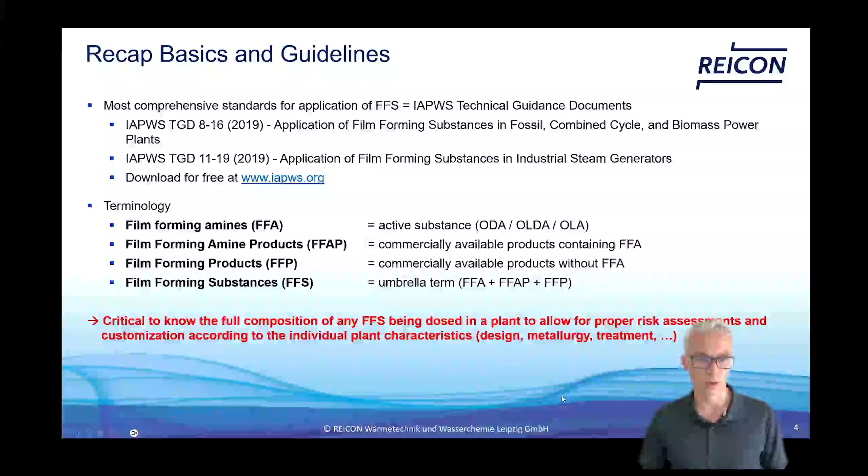In the second webinar, we heard about the analysis procedures. In the TGDs, there are two methodologies included: one is the extraction method with methyl orange, the other is the xanthene dye reaction.

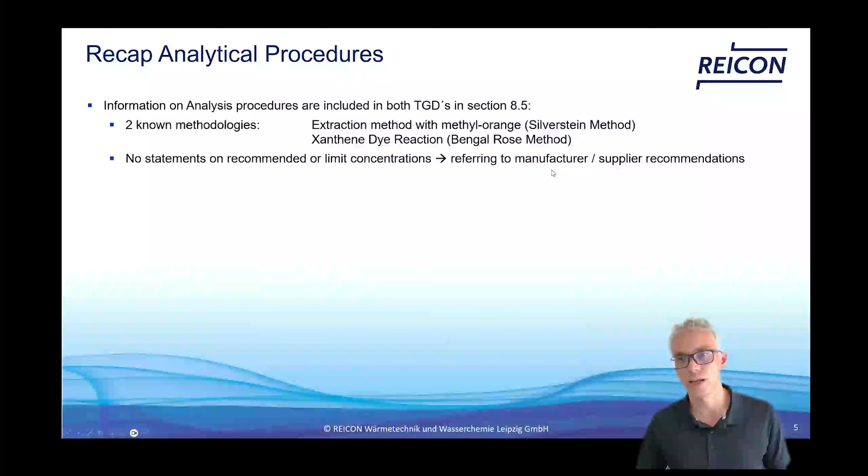From both methods, there is information given inside the TGD. What we do not see is any recommendation on the concentrations of the product - this is related to the manufacturer guidelines. Three different procedures are available.

We have the field test, which is a fast analysis, mostly done by grab sampling, with no additional photometer necessary to get information about the concentration in the system. But the sample needs to be analyzed quickly because there is nothing inside which allows the sample solution to be stored - so we get a filming of the sample bottle as well. You need to follow the rules of sample taking, and then it will work very well.

Then we have the laboratory procedures, which have very high accuracy and a very low detection limit. If you add the buffer solution, it's also possible to do transport or storage of the sample taken from the system. But you need specific laboratory equipment, and also you need some practice in doing those analytics to get reliable results.

And the last thing is online monitoring, which provides a continuous measurement of the FFA in the system with very high accuracy. But of course, there are some investment costs related to purchasing the system and the chemicals which are necessary.

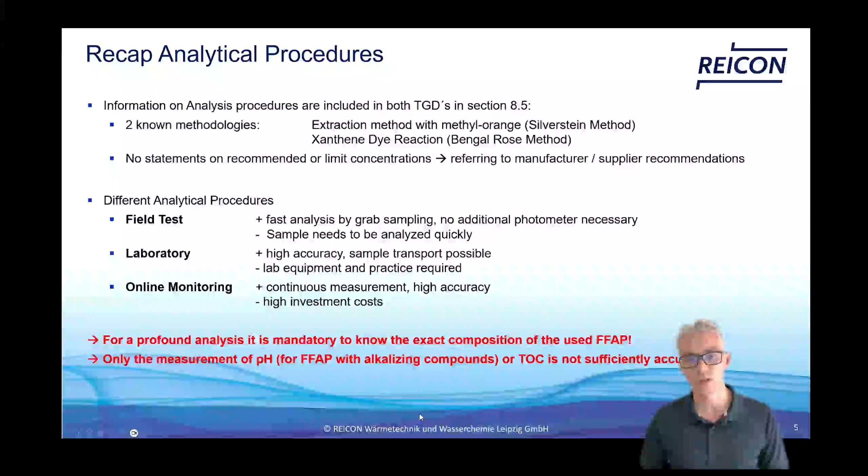So you need to know which product you're using and which FFA is inside. A measurement of pH alone, when you're using an FFAP with an alkalizing compound in it, is not accurate enough to have a safe application, especially when you're doing continuous dosing of FFAs in the system.

Starting with the topic of today, I would like to give you some information on why power plants, for instance, or also industrial plants, consider the use of film-forming amines.

In most cases, it is due to some cycling operation because of an increase in flexible power production. So you never know exactly when to start or when you will stop again. At the same time, you need to have high availability - you need fast startup times, and you need to protect the system in the offline period, whether that is 2 days or 2 weeks.

You need to make sure that you quickly achieve the limits of steam quality, especially to run the turbine. In some cases, plants need to start up very quickly without having the right quality for running the turbine without problems. That's why there's a need for additional protection to the system.

Load changes have an influence, especially in the phase transition zone at low or part load of the power plant, so you have fluctuating conditions. The area, especially the last steam blades, can get wet and dry, and so the condensing point is changing, which can cause deposits on the steam turbine.

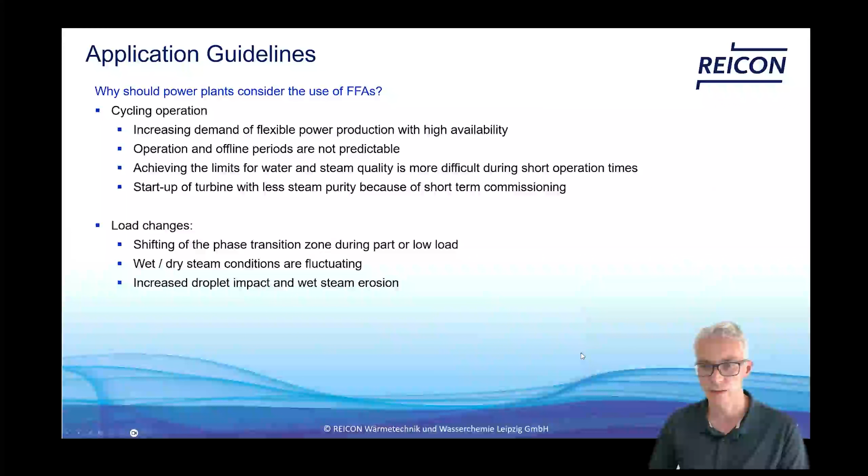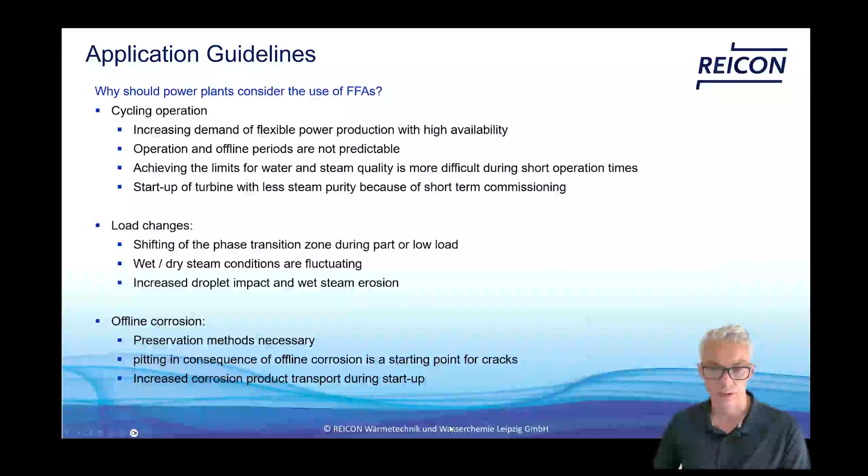You can also have increased droplet impact, especially on the last turbine blades, which can cause erosion on those blades. With that erosion, and maybe some pitting corrosion from offline periods, you can get cracks, which can be starting points for stress corrosion cracking.

Also, especially after a longer outage, you can have increased corrosion product transport, so you get all the related issues with clogging filters and getting a lot of particles in the system.

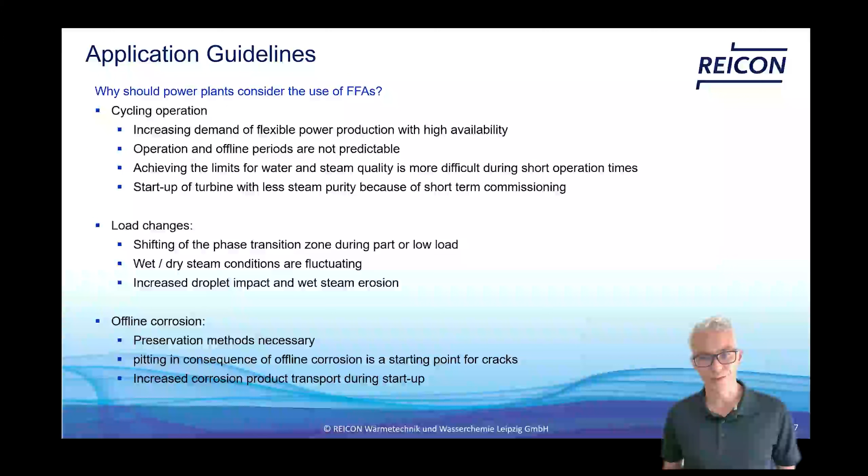Generally, we start to feed the FFA in the feed water tank, because here you have good mixing within the feed water, and you can easily control your dosage by measuring the concentration in the feed water tank.

The second option is dosage into the condensate lines. The benefit is that shortly after starting the dosage you will protect your preheaters. So if this is a point to look at in terms of corrosion, it's always recommended to inject in the condensate lines.

There might be a need for high pressure dosing equipment when you dose in this area, but you need to see the details of the plant, where is the best way to inject, and also what is the scope of the application.

If you have an air-cooled condenser, for instance, it might be useful to have additional feeding right in front of the air-cooled condenser, because this is the equipment with the highest surface, mostly made of carbon steel. So if you get problems with offline corrosion, it will be in this area.

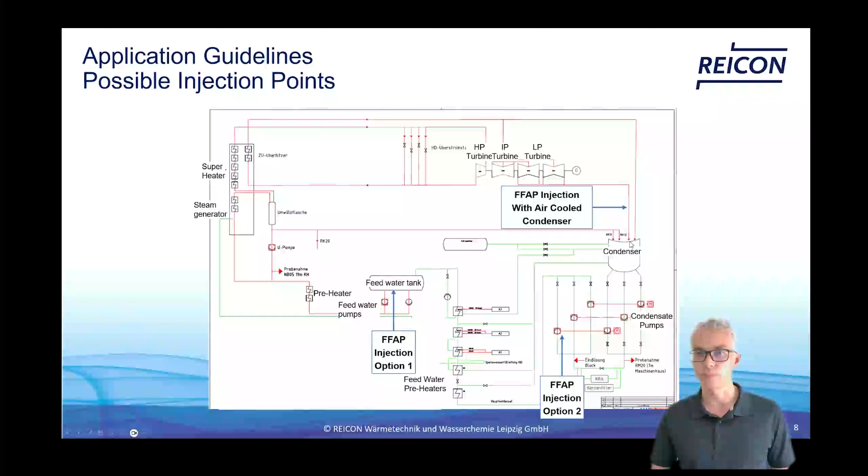Generally, cycling operation is characterized by operation times and standstill periods. These standstills are unpredictable, because they can happen on short notice, and then you never know how long the standstill will be. Is it a small one, or will it take longer?

So it's really difficult to apply standard preservation procedures like drying the system, or filling the system and capping it with nitrogen. Especially if you have daily starts and stops, it's really, really hard to find the optimum application.

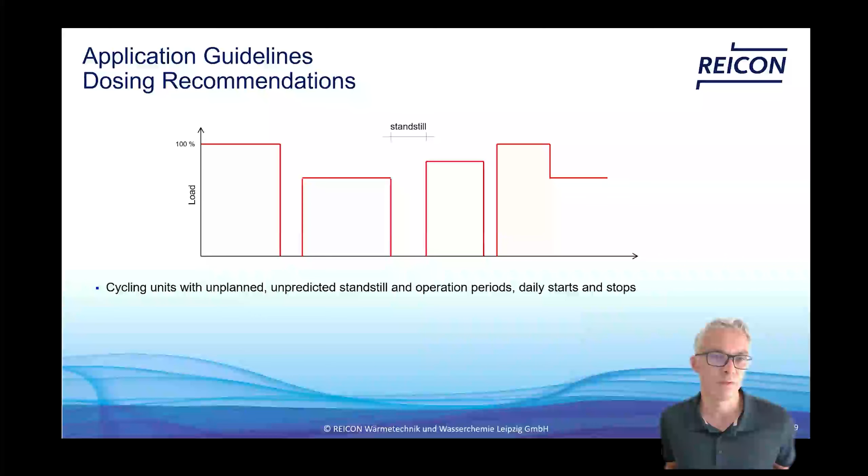So in this situation, the film-forming amines can be a very good solution. They are dosed at a very low concentration. This concentration depends, of course, on the product used, but also on the operational time in regard to the standstill time.

If you have more operation and less standstill, you can go with a lower concentration. If you are facing a lot of standstill with very short operation cycles, then it might be useful to have a higher concentration of filming amines as a residual in the system.

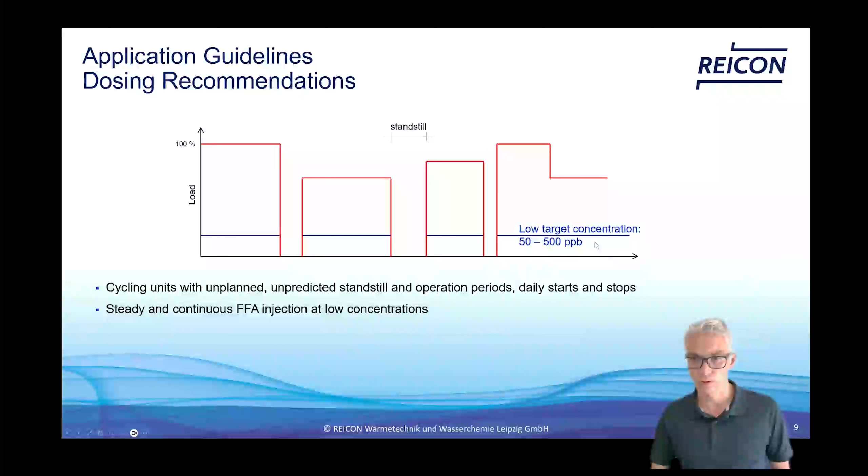This is the concentration after you have the complete filming of the system, so the residual, which we can measure with the analysis procedure introduced in the last webinar.

Of course, if you have continuous dosing, you need to monitor your concentration very frequently, to make sure that, also in load changes and low load operations, you do not exceed the concentration limits and create any problems in the system.

Of course, it would be much recommended to use an online monitoring system to be safe at all states, or to perform a regular lab analysis twice or 3 times a day to make sure that the concentration is in the right target.

When you're starting adding FFA, you will see that you might have some changes in your water chemical values, especially when we look at the conductivity after cation exchange or other values, because we have an implementation phase where there are some changes, especially when there are some impurities settled down on the surface. They will be removed and captured with the FFA.

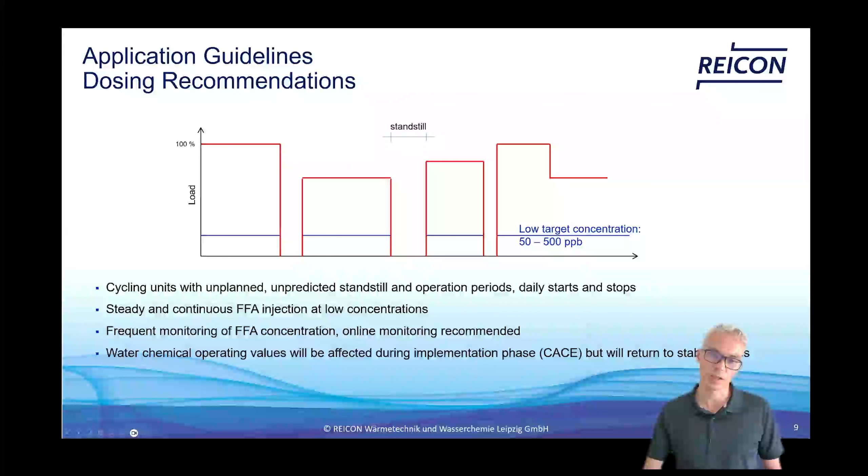So we will see an increase. But after a while, maybe 2 or 4 weeks - this depends on the system, on the concentration, on the operational parameters - we will see again stable values, and a new baseline may be forecast because of the organic matter of the product and the created CO2. This might have an effect on the conductivity of the cation exchanger.

Yeah, of course, there are some restrictions. We already talked about the CACE increase. It is an organic molecule, and it will start to decompose at temperature above 400 degrees Celsius.

So it will form mainly volatile products. So it's CO2 and NH4 and other volatile products, which depends also on the used FFA, but also on the used film-forming amine products and the other byproducts which are in this mixture.

In some cases, it is reported that it will come to a formation of low weight organic acids. So you need to check again what is the composition of the product, what is inside of this. If you use a blended product or a mixed product, what are the individual active substances and what risks are according to that.

And if you have a creation of carbon dioxide, you will increase the CACE, especially in the conversion time during the first weeks.

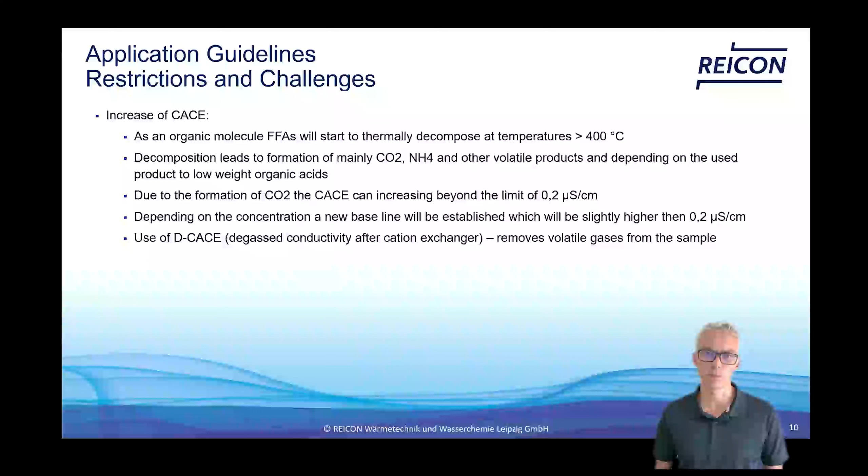If possible, and maybe if it's installed, you can use a degassed conductivity measurement, which removes the volatile gases from the sample, and then you can see, again, very low conductivity values. This will help also to avoid the influence of the CO2, which is created by the decomposition. And you can easily detect any leakage from the condenser with this method.

Another part is if you're having a condensate polishing plant in operation, in those mixed bed resins, the FFAs are accumulated in the filter vessel. So we saw some applications where, especially after treatment with very high concentrations, the top layer of the resin is floating up.

This is due to the accumulation of the FFA in the resin bed, and then because of density it comes to like a floating effect, and because of the temperature and the saturation concentration, we see a white layering on top of the resin bed.

But this can be solved by increasing the temperature in the condensate polisher. We also did some research on that and see that especially when you do a warm regeneration or an additional treatment with caustic, the capacity is not affected, and the regeneration process can be done normally without having any influence on the capacity of the used resins.

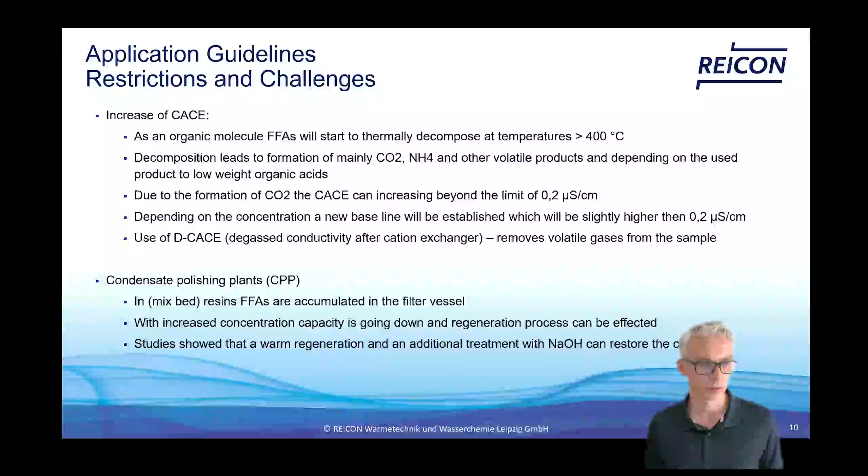So let's come to a few case studies. The first one is a combined cycle unit located in the western part of Germany. The system consists of 2 gas turbines, 2 HRSGs, and 1 steam turbine without a condensate polishing unit, and it's under flexible operation with very low operational cycles, and a very fast startup was required.

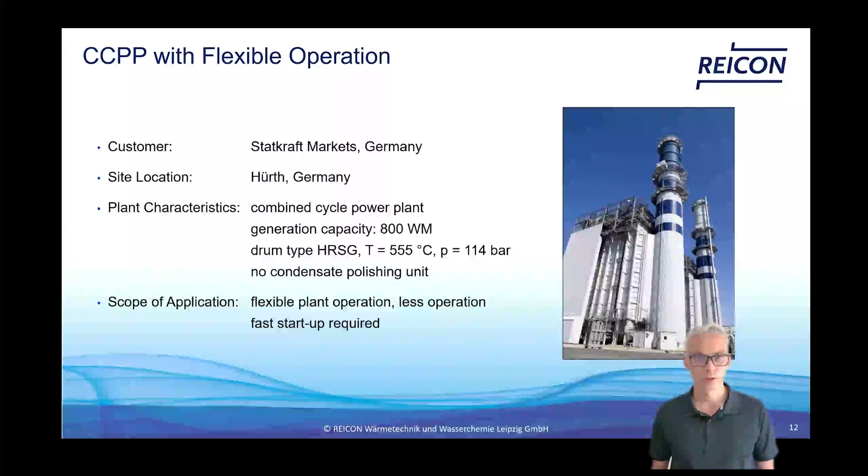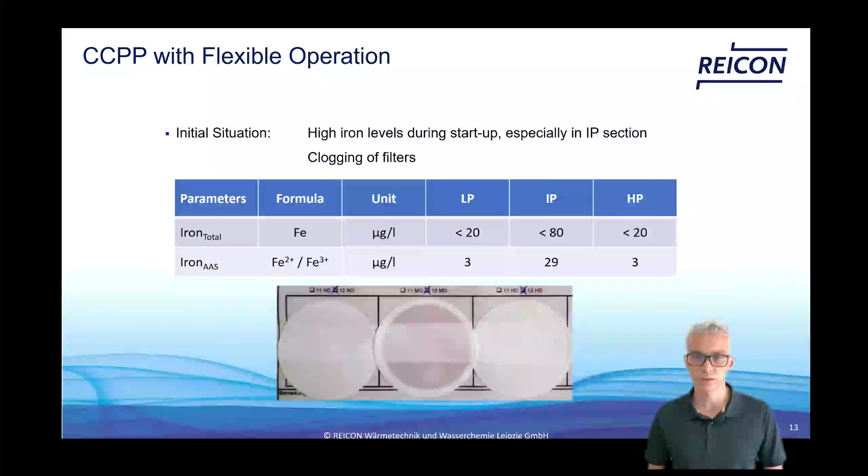The initial situation was that even with an already existing preservation in place, there were some problems with high iron levels during the restart, especially in the intermediate pressure section. And then it comes to clogging of filters in the condensate, and they had to shut down the plant again during the restart to clean the filters and do the restart again.

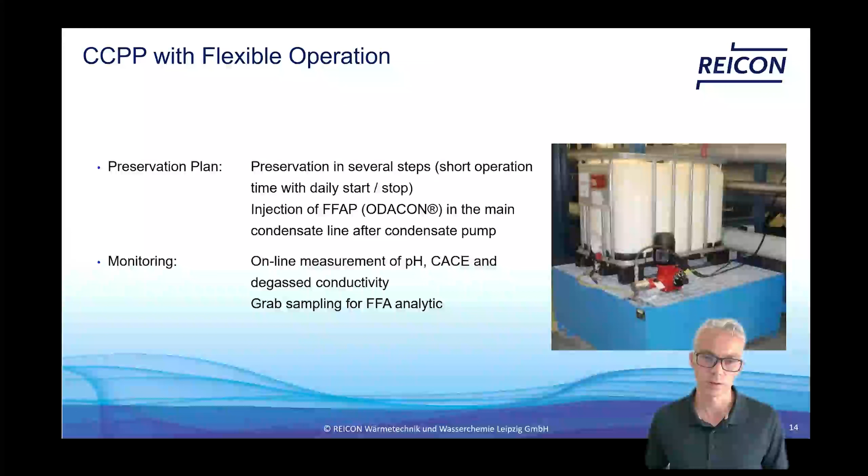We applied the dosing into the condensate line after the condensate pump using a high pressure dosing system. And we could measure the pH, CACE, and also degassed CACE online, and did a grab sampling for the FFA analytic. And we saw very good results, especially in the condenser area and in the last stages of the steam turbines.

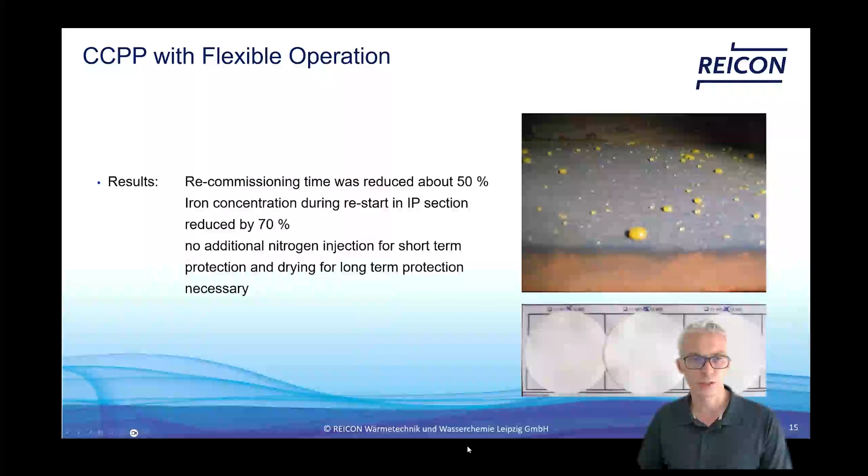We had established good layering, and the iron concentration during the restart was reduced by 70%, which is a very good effect for the plant. No clogging of filters anymore, and they don't need an additional nitrogen injection in the boiler or drying for the system, especially the steam turbine and condenser, for corrosion protection. They just did it using the FFA.

Another example is a biomass plant in Sweden, which runs only during the winter time, and then only for peak load operation. So here too, very flexible operation with a lot of starts and stops.

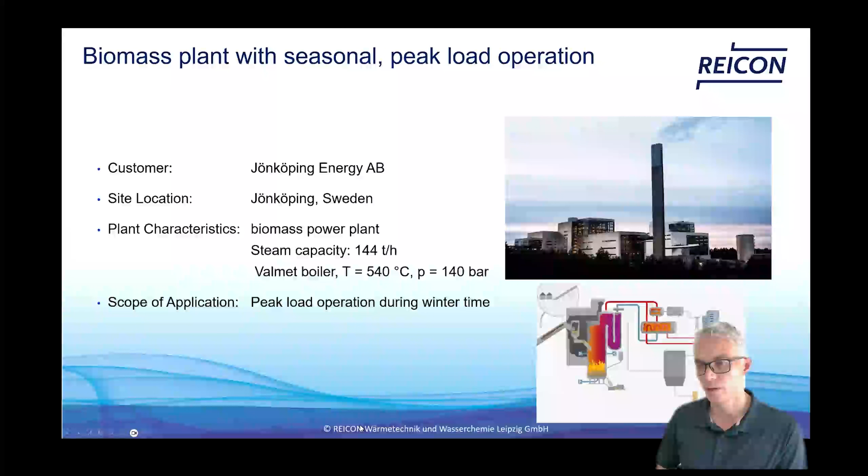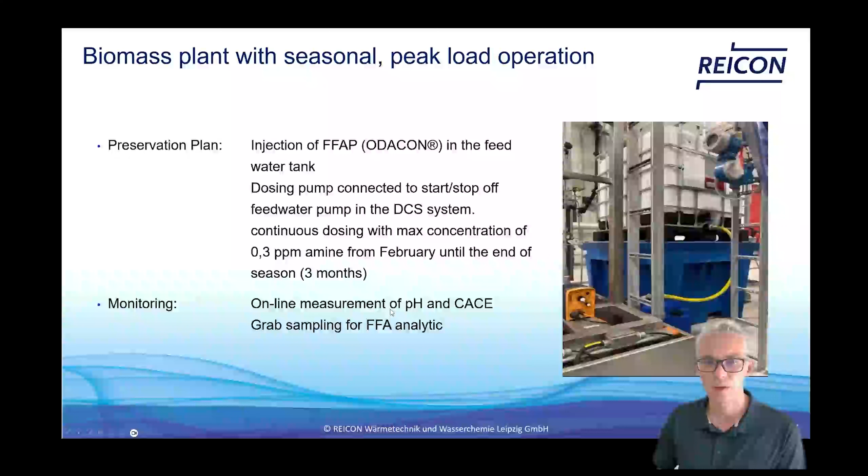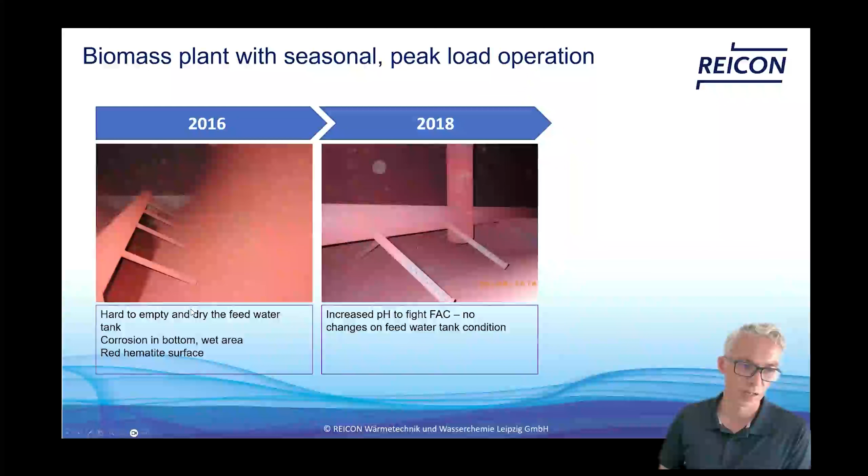We injected the ODACON here in the feed water system, and established a concentration of around 0.3 ppm of FFA in the system. Here too, we could see that before treatment the feed water tank had a red surface, a lot of corrosion in the bottom, and even with increased pH there was no effect, especially on FAC.

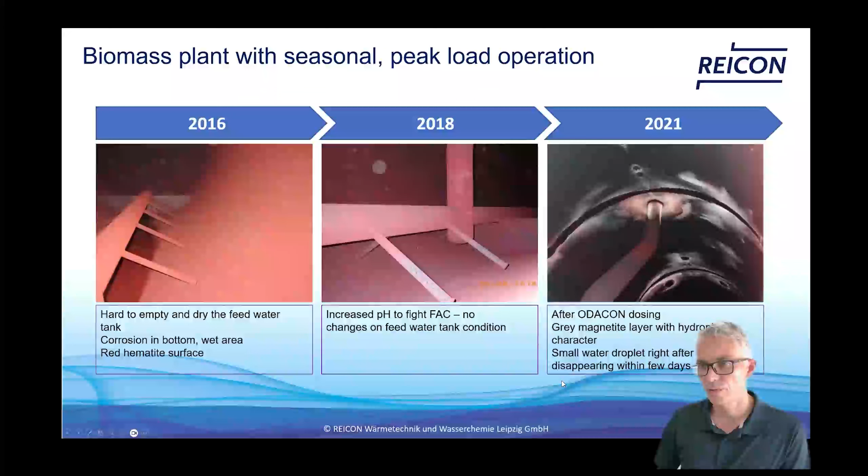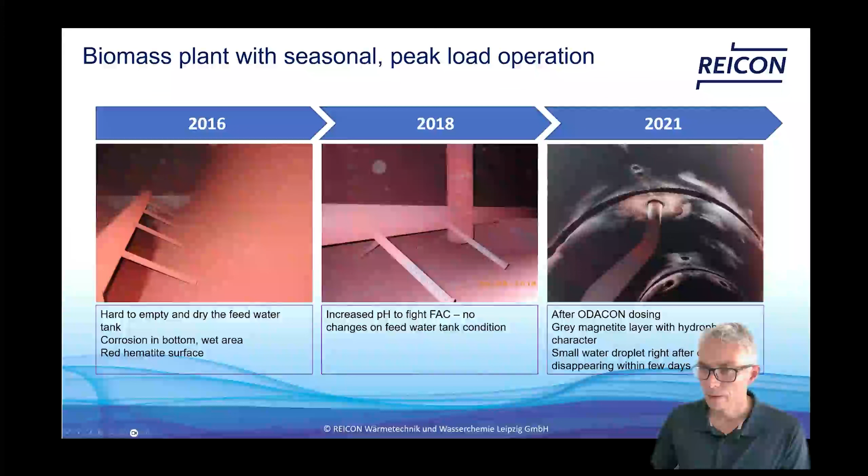With the treatment we got a change from red to a gray magnetite layer. The white spots you see on top are very small water droplets, and after opening the vessel they disappeared very quickly during the annual revision. So the feed water tank was very clean and very well protected.

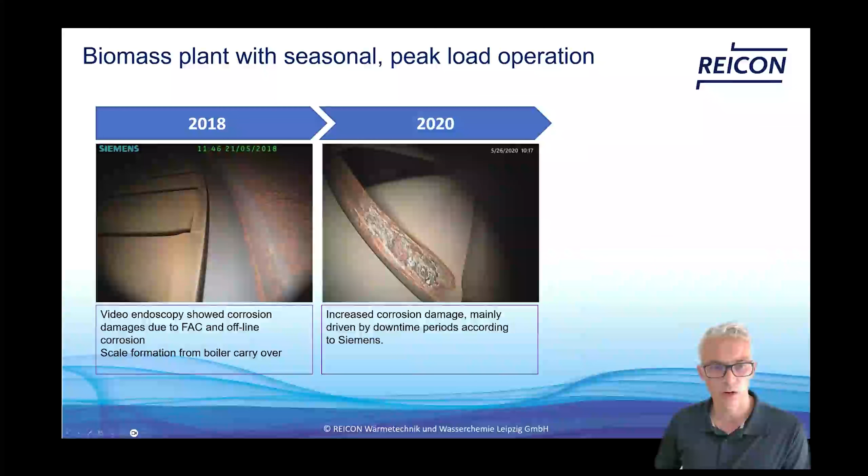On the steam turbine, there was already some corrosion ongoing, especially FAC corrosion and offline corrosion, and because of some boiler carryover there was already some scale formation. After applying the FFA, we got shining surfaces with no signs of further corrosion, and deposits were reduced. So we had a very good effect on the overall plant.

So that's the overall plant situation with continuous dosing at low concentrations. Now we are already at the end of the webinar, and would be happy to answer some questions if there are any.

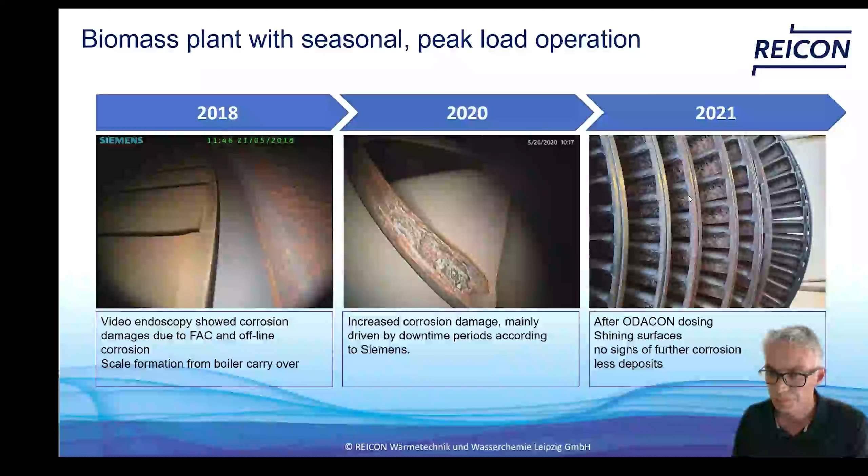David was asking about testing for residual nitrogen. No, there was no testing for nitrogen on the blade surface.